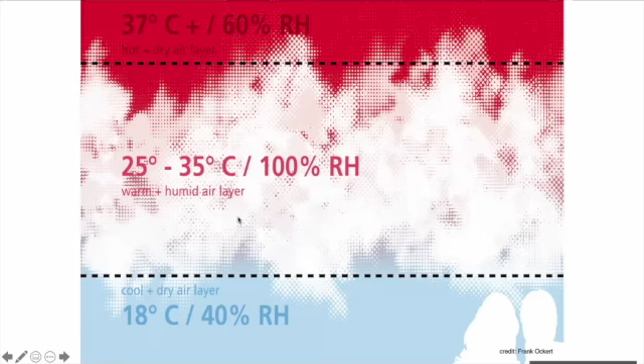So we need another hot layer with something like 90 or between 95 and 100 degrees, but dry air above. And with these two layers, we squeeze this cloud layer in between. So you see, it's engineering, it's climate engineering.

And then Tetsuo Kondo, an architect from Japan, designed the space, he designed the ramp where people could walk through the cloud and really experience the different climate conditions. And here you see the cloud from below, and this is the cloud from above.

So it's just an example of to what extent we can really manipulate climate conditions in a very short distance, and to what extent we could use this knowledge also to provide comfort locally and not condition buildings, big spaces everywhere. Of course, this is not our core business, doing clouds. Usually we try to avoid getting clouds in buildings.

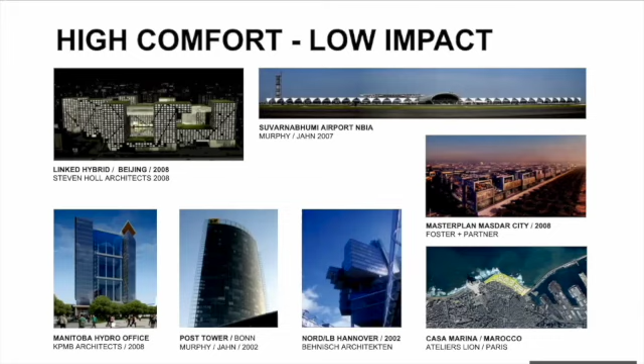Now I could talk about all these amazing projects with amazing architects we had the pleasure and the honor really to work with over the past almost 30 years, which was an amazing experience. But let me focus on this.

I think it was amazing when Biden yesterday announced that the United States wants to reduce carbon emissions by 50% by 2030, and that the next decade will be decisive. That's a short period. 10 years is nothing for the building sector. And like Stefan said, the building sector is kind of key. It's key because, from all sectors, it has the highest contribution to our carbon emissions.

But not only this, our building sector is also responsible for a certain amount of carbon emissions that comes from the industry, like material production, but also the way we design cities, our urban design planning, is contributing significantly to commuting. So density, urban sprawl, etc. So it's not only building design, it's urban design, and altogether it is decisive of how we design the environment in which people live.

So it's a very high responsibility, and we know that this requirement of reducing carbon emission by 50% is going to change our built environment. The question is how, and how can we design it? I'm trained as an engineer, but from my point of view, it's less of an engineering task and more of a design task. And I'm going to show you a couple of reasons why.

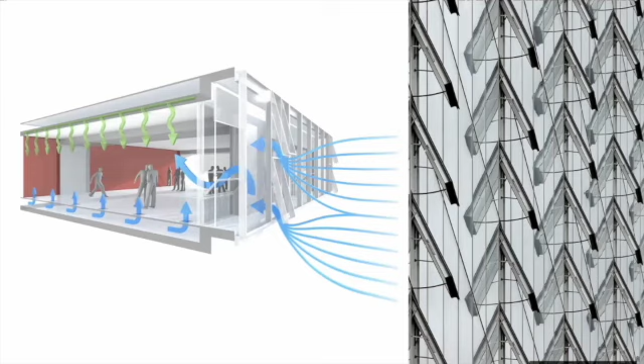So you see this high adaptivity of the facade systems, of the overall building, of how buffer zones wrapped around the building, combined with openings, combined with retractable shading devices, all contribute to a passive, mechanically hybridized climate control system and strategy.

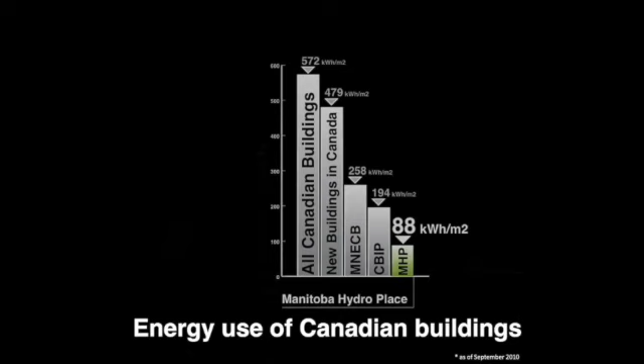What does this all mean in terms of energy? So what you see here, MNECB was the building code when we designed the building. So it was requested that we design the building for a number somewhere below 260 kilowatt hours per square meter in a year. On the left side, this is typical Canadian commercial buildings. And the 88 kilowatt hours was what we projected in design with our modeling. So you see it's significantly lower.

And then when we started to operate the building, after a couple of years, here first the good news, in terms of complaints, that was a surprise for us. Manitoba Hydro did this kind of post-occupancy evaluation, comparing the building to other buildings they operate.

And in the 3rd year of operation already, we had only 50% the amount of complaints for too hot or too cold in this building. Despite the fact that we condition it with the concrete slab, it's a system which is so slow reacting that if someone complains that it's too hot or too cold, it takes about 24 hours to correct the temperature by something like 2 degrees. So it's so slow reacting that there's basically no control.

And compared to a fully air-conditioned building where people can go to a thermostat and say, I want to have 72 degrees now, and then an air conditioner kicks in, compared to such a building, we have half as many complaints. Very interesting. Good point for research.

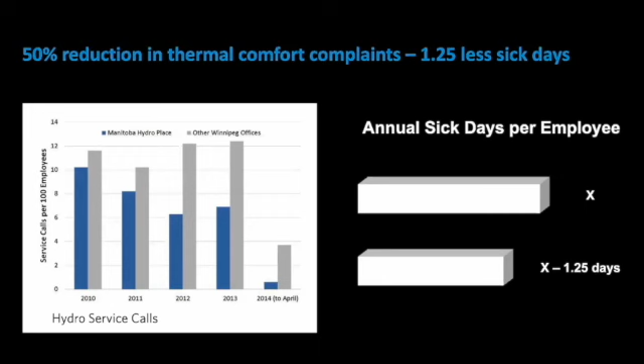And then every workplace is exposed to daylight. We have, which became interesting now in COVID times, 100% outside air, no recirculating air in this whole building. And so overall, we have 1.25 less sick days measured compared to other more typical North American buildings. So that's the good news. So people obviously appreciate the environment, the daylight, the natural ventilation, the radiant cooling, and not the drafty, noisy, typical air conditioning systems.

Now the bad news, we also looked at energy, and the first year of operation when we had full data was in September of 2010. And the previous year, we ended up with a number which was almost 100% higher than what we had projected. And then it was October 2010, November 2010, and so on. And it took us 2 years of fine-tuning, of monitoring, to get to what we had predicted. 2 years.

And you see here, there was a jump. In the first year, we had some issues with the hydronic system. We couldn't really use the geothermal heating system well. And so some adjustments needed to be done. But everything else was only fine-tuning controls, sensors which are a little wrong, or lighting which turns on too early, all these kinds of things. So it was not the one thing, it was like 100 things.

And you need to find them. You need to spend time. You need to look into the BMS, the building management system, and fine-tune and find all of these things in order to get to the building operation. So we call this performance gaps. Something we got really concerned about.

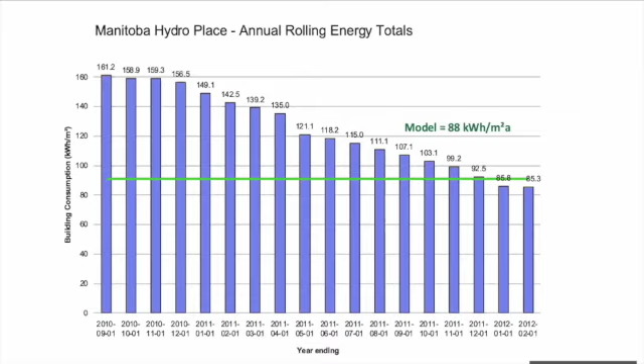We thought, are our buildings too complicated with this high adaptivity of shading devices that go down, operable windows that open up, etc.? Is it too complicated? Also, this hybridized approach between passive and active. So we did some literature research, and we found this study done by the Royal Institute of British Architects, called Better Spaces for Learning.

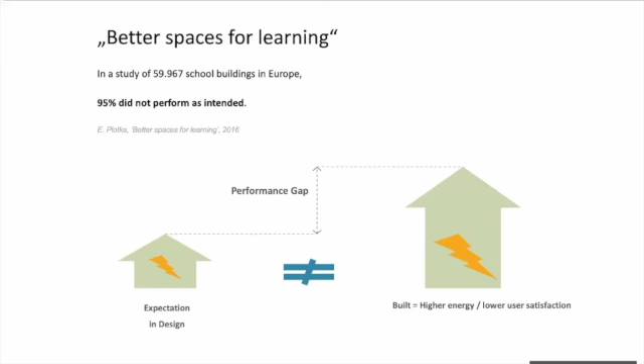And in this study, they looked at almost 60,000 school buildings all over Europe, and they figured out that 95% did not perform as intended. 95%. So we recognized it's not just us, it's totally normal. It's totally normal that we design buildings which do not work as designed, and we just accept it. And then we found another study in Germany and figured out that typical office buildings have an average performance gap of 70%. 70%. We accept.

We always blame the automotive industry that cars are using more gas than what they advertise. But we are not better. We are worse. Just recently, someone in a public discussion said the building industry pretty soon is going to have their Volkswagen moment. I think we are not there yet. Given the pressure that comes now with what Biden announced yesterday, it will come now. We're going to have our Volkswagen moment now, and we have to become serious about this.

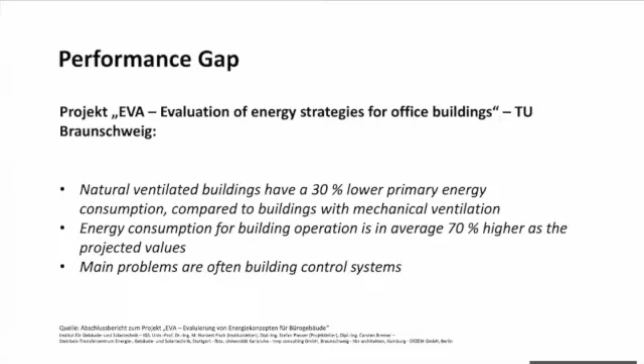So what we recognized, we developed these models on these highly adaptive facades. We showed that in extreme climates, not only in cold climates but also in hot climates, we can do smart buildings, even if they are highly glazed. They can be very efficient. They provide good comfort. They have this kind of adaptivity. But this is what we see. And the building in Canada, we completed in 2010, 10 years ago. Except for ourselves, almost nobody in North America tried to copy the model.

It's kind of annoying. So this is, let's say, international style. But the model we have developed, we showed that it can be successful. But we also recognized when we need 2 years to get it to operation, it's not a robust model. So as a first hypothesis for tonight, I have to state that this glass architecture has failed as a model in terms of robustness and sustainability. That's what we need to state.

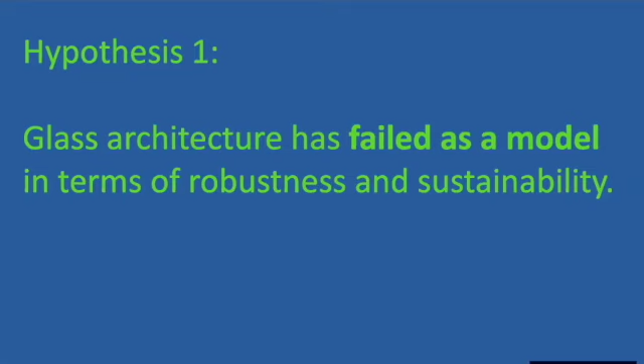And so over decades, we talked about high tech and low tech, and we never found a definition. And so suddenly with robustness, we have a methodology we can use to really test how robust the system is. Like the Manitoba Hydro system, when we tested in our modeling with a shading device that failed, and an operable window that doesn't open, then we suddenly recognized the space overheats. So we need to have these kinds of stress tests to see how robust an overall system becomes. And that's why we love to talk about this, because, again, high tech and low tech, there is no real definition of what it means.

At the university, we worked on 2 books. And I want to quickly show you some results of one book, which was another aha moment for me personally. So this is a book about schools. Unfortunately, those books are published only in German. I'm very sorry for this. But we did this book on schools where we compared 12 schools together with the chair of Florian Nagler. And the bottom right school here is a pure timber building, massive timber building, designed by Florian himself. Florian Nagler is an architect from Munich, and is also a colleague at the university in Munich.

We looked at buildings from different periods, and we started with a building from Theodor Fischer, who was a very important architect in Germany in the early 20th century. He designed this school building here on the upper left side, which was completed in 1898, so 120 years ago. And then a building from modernism in Amsterdam, some buildings from the 50s, 60s, say this one from Günter Behnisch in Göppingen, and then 80s, some of them already renovated. And then a couple of newer buildings, basically 2008, 2011. Those 2, Recklinghausen here and Erding, are designed as passive house schools without operable windows. And then this timber building.

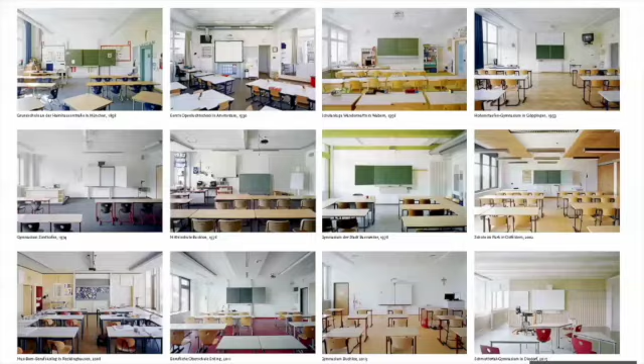I don't want to go through the details, but we asked the photographer to go there to take pictures in every building from the same position. So we have pictures from every classroom, which was quite interesting, from every corridor, and even from the mechanical rooms.

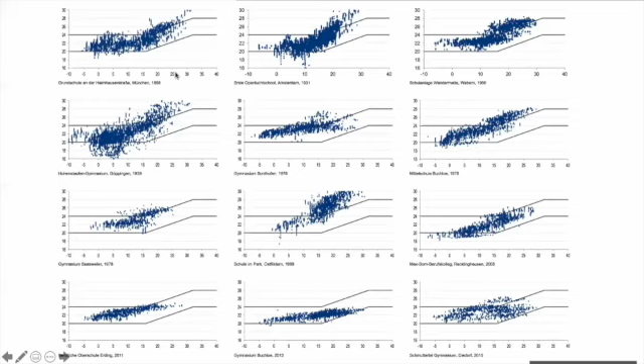And then we did measurements. And so you see here a 5-minute measurement during occupation time from each building, looking at outdoor temperature on the left side, an indoor temperature over outdoor temperature, and you see the comfort band. And don't worry, I'm not going to go into the details. I'm not going to explain every single number. But we also looked at CO2 concentration, so on air quality.

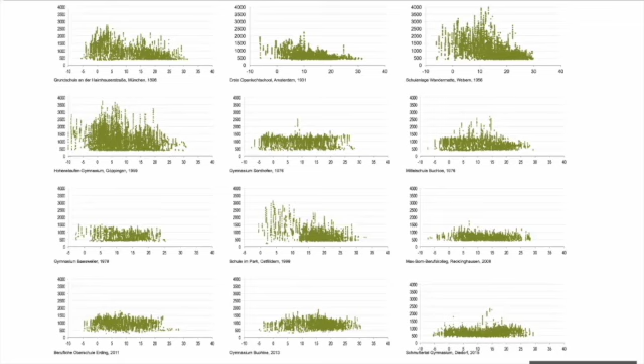Some of the buildings do have mechanical systems with cooling. Some of the buildings have mechanical system for ventilation. Some of the buildings are purely natural ventilated and have no mechanical cooling.

What we figured out is that the building of Theodor Fischer, which was completed 120 years ago, the space is 4 meters tall, which is like 12 feet tall. And it has 800 square foot instead of 600 square foot, what we do today. And we do something like 9 feet tall today. This one has 12 feet. So much more volume per kid sitting in there.

So what we figured out is that from all buildings which were naturally ventilated, the historical building had the best air quality, which is kind of understandable because we have twice as much air volume in this building per person sitting in there. But also from all buildings without mechanical cooling, it had the best thermal comfort in summer.

Given the thick brick walls the building has, also partition walls 1.5 feet thick, the thermal mass led to the fact that this building has the best thermal comfort in summer from all buildings without mechanical cooling. But not only this, it has these tall windows, and because of these tall windows with the lowest fenestration ratio, we get the most even distribution of daylight because those windows are taller because the space is taller, and so daylight falls deep into the space.

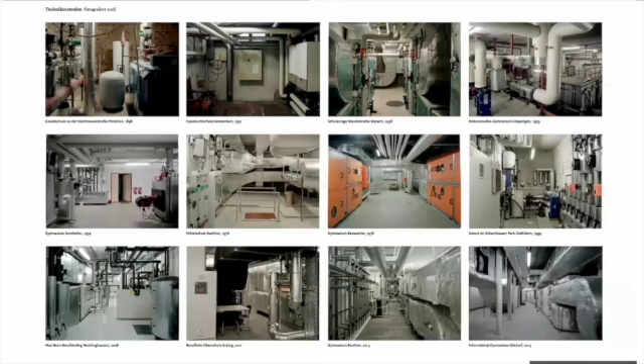So today in research, we would call this multi-objective optimization. And now coming back to Aravena, his quote, at the time, 120 years ago, this was common sense. And this is what we have lost. You see here the mechanical rooms of the buildings. In the Theodor Fischer building, we have a boiler room of something like 300 square foot.

In the timber building of Florian Nagler, which is supposed to be, let's say, high-end energy efficient in terms of all the high-tech, high-end mechanical systems, they had to build a gym under the building to house all the mechanical systems needed. All the mechanical systems needed to achieve an energy efficiency, which is never there because of performance gap. To achieve an environmental quality, which we have lost because we lost this idea of architecture.

We lost the floor to ceiling height. We squeeze people in much smaller spaces. And then we try to overcome this loss of environmental quality with mechanical systems. And then we save space above ground in order to build it below ground. This is stupid. This has a level of stupidity, what we are doing.

So I don't want to talk about style here. I don't want to say that we have to go back and do buildings like 120 years ago. It's this understanding of environmental quality, of spatial quality, and get this back into architecture, get it back into design, and not try to solve everything with mechanical systems.

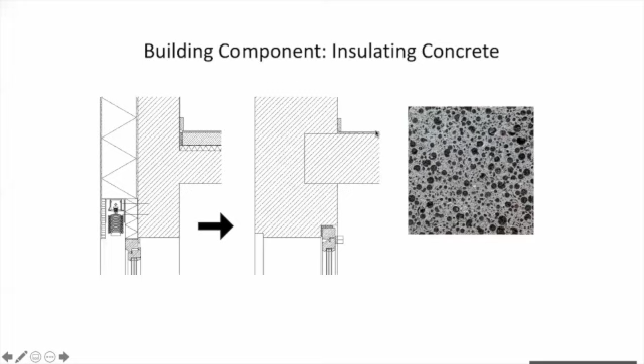So we need to design like Theodor Fischer. Then we don't need a shading device. We use insulating concrete, so then we don't need to have outdoor insulation. We put all the installation, make it visible, put it on top of the walls. Then we don't need this floating screed. And so the same principles we developed, mainly Florian Nagler, his chair, also for timber. How can we design a timber building, reducing the amount of layers with brick?

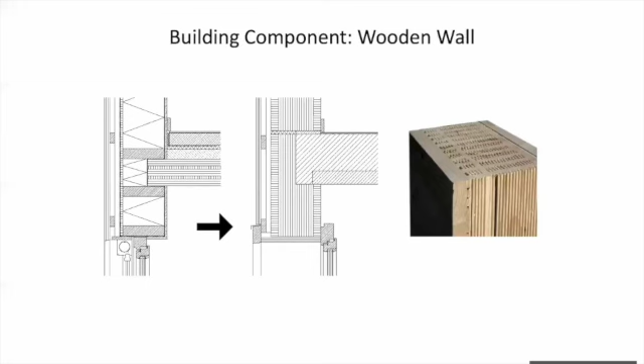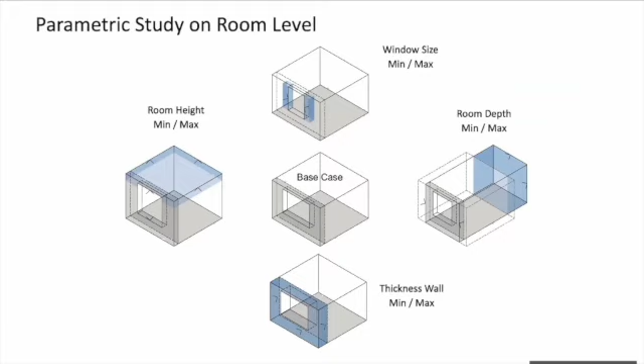And then we found a developer who was interested, but we also did this kind of parametric study on room level. And we wanted to prove that building height is essential, room height, floor to ceiling height, that if we increase floor to ceiling height, we can get the narrow windows that are tall so that we get daylight deep into the space. We get a very even daylight distribution. But by doing this, we get lower fenestration ratio and then get rid of shading devices.

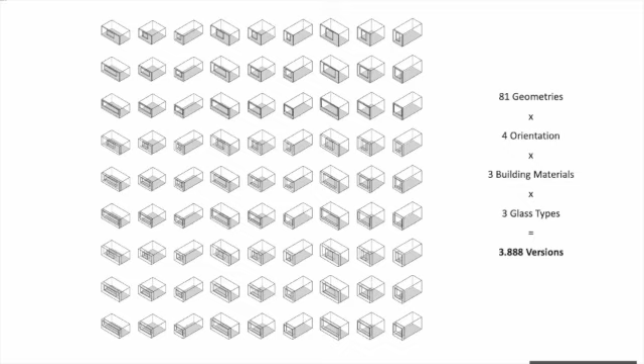And so we ended up with 81 geometries, 4 orientations, 3 different building materials, 3 different glass types. So we studied something like almost 4,000 options and basically tried to prove Theodor Fischer, tried to prove common sense of 120 years ago. And then we looked at uncertain boundary conditions on top to test how robust the overall system is.

And again, I don't want to go into the details, but as a final result, what we figured out is that the brick building here, for instance, compared to a passive house over a 100-year life cycle, even though we designed those buildings to minimum energy standard in Germany, we said, forget about energy efficiency. We don't go beyond minimum energy standard. And then over 100 years, for a normal user, so the dotted line here represents the normal user, we are better or almost the same as a passive house.

The timber building obviously is much better because it has less embodied carbon because of materials sequestration of timber in the building construction. So we found that this is much more robust. Even though we have a higher energy consumption on day one, over 100 years, we have a better performance than all of these, let's say, super high-end buildings, not even considering performance gap.

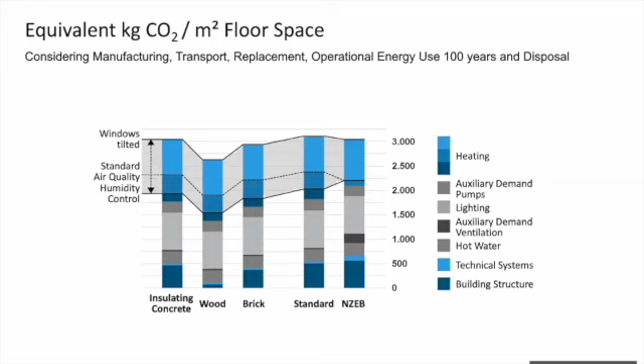And then we found this developer in Bad Aibling, B&O Group, who were interested in this research, and they said, come on, I'm gonna build you 3 of these buildings. And now these got highly published all over Germany, because I think also of the aesthetics. I was impressed that we do all these research projects which end up in a report. Nobody cares about these reports. But as soon as you build something, all of a sudden, it's published everywhere.

With timber, of course, you can have a beam, but also with masonry, we said no beams here. The bricklayer had to lay down this arch so that we don't need any beam, any steel and concrete in this brick structure, so that we keep it all pure, one material.

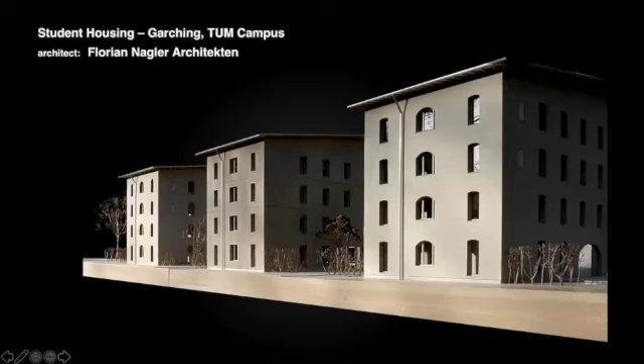And now we are in a phase where we design 3 buildings for student housing, a total of 200 rooms. And now you see the roof system, the roof structure. So we said as a next step, we have to become carbon neutral or zero energy, however we want to call it. And then we looked at how much energy do we need to generate if we put photovoltaics on the roof. And then I went to Florian and said, we need bigger roofs. We need to generate more power. And therefore he started to design these overhangs.

And he said it's kind of interesting because through modernism, we got rid of these overhangs. And now all of a sudden, because of solar energy, we get it back into design as, let's say, a kind of a design methodology.

Here you see the idea again using space height. This is a picture into the model. The spaces here are also something like 10, 11 feet tall. And so the bed is on top of the bathroom so that we get taller, but also more narrow. Here again, this is a model picture. You see the bed on top of the bathroom.

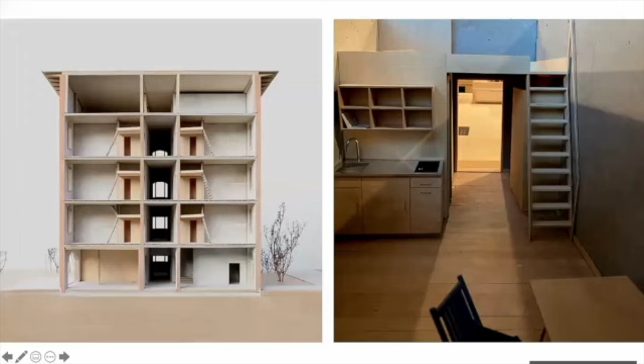So this is in design, and I hope we start construction this year. Again, picture from the model. You see the extended roofs, creating this overhang to get more solar energy generated on the roofs.

So we always have this debate of minimizing material due to embodied carbon. And just for fun, I looked up how much embodied carbon do we put into 1 square meter, so 10 square foot of wall assembly. And if we have a double facade, floor to ceiling height, then you see that even though it's always considered lightweight, the highest embodied carbon we do have in a glass facade, like the Manitoba Hydro facade.

If we use concrete and external styrofoam insulation, this is concrete wall, then a brick wall, sorry that it's named here in German. And then this insulating brick is better. But then as soon as we get to clay and timber as, let's say, wood wool for insulation, then all of a sudden it can become negative. So that's the potential. So there is no straight correlation between the amount of material we use, the kilograms we use, and the embodied carbon.

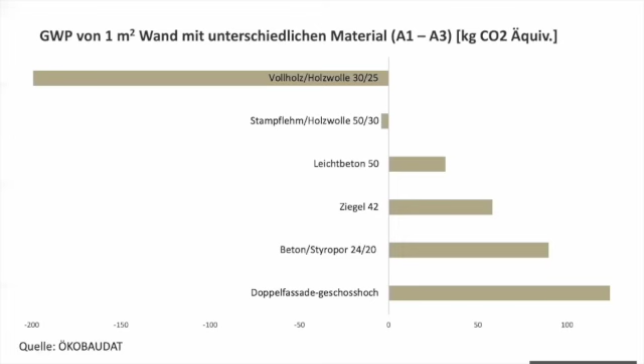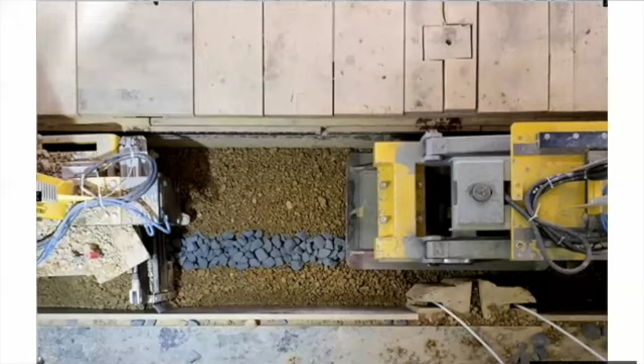So with this in mind, we worked with Haas Cook Zemmrich on the headquarters of Alnatura. Alnatura is a supermarket chain for organic food. And of course, they wanted to have a very sustainable building. And so we ended up with a rammed earth wall. Material was supposed to come from the site. There were some difficulties, I'm not going into this, this would be a lecture in itself. But there is a company in Austria called Lehmton Erde, Martin Rauch. They industrialized, let's say, the production of clay walls.

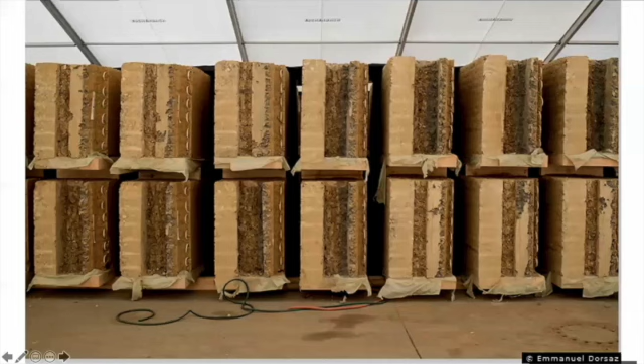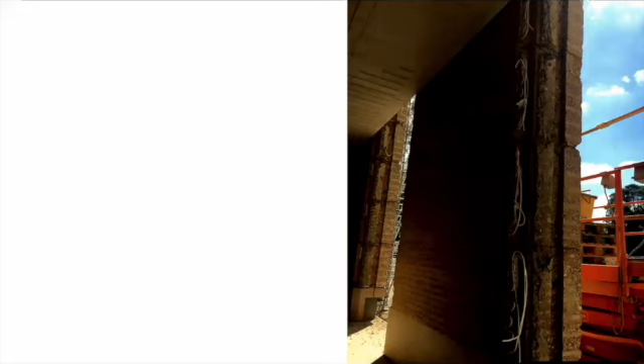And here you see we put in foam glass, mineral material for insulation purposes, embedded in the wall assembly. And then we also put in piping for heating and cooling purposes, so that the walls are a radiant source for heating and cooling. And so he created these kind of wall assemblies and put them into a warehouse close to the building site and dried them during construction time. And then when the superstructure was ready, he had his cherry picker bring them piece by piece on site. Here again, you see the piping for heating and cooling purposes. And this is how it looks now.

This is the space. It's all open. It's really low tech. We reduced the mechanical system to a high degree, trying to take advantage of clay. And the beauty of clay is that it has a lot of thermal mass, providing passive temperature control. But it's also still among the best materials for hygroscopic control of space, so humidity control of an indoor environment. It's a beautiful material. It's available everywhere. You can get it for free.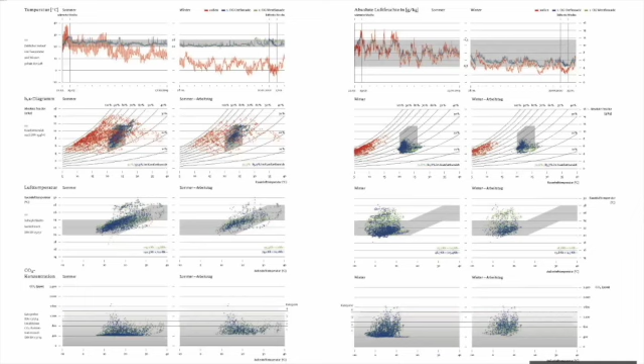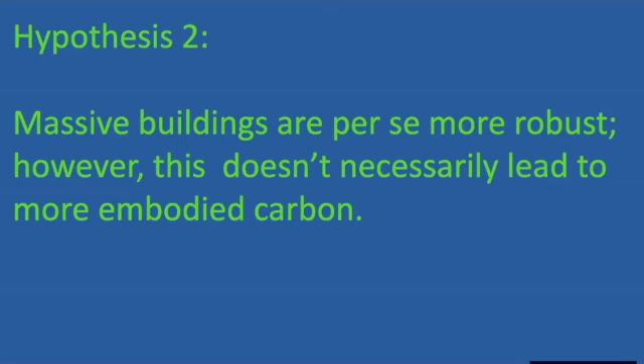I want to finish and show a few slides. I'll go over it very quickly. I've talked too long so far.

Talking about outdoor comfort, urban microclimate. I know in Vegas you're in a desert climate, but we see climate change changing our climates, mainly in our cities. That's why we also have to address climate not only in an indoor environment, but also in an outdoor environment. We did an exhibition last year in Berlin. The basis of the exhibition was a published study, you see the source on the bottom, which showed the delta in temperature expected in our cities worldwide. And we recognized that among the highest deltas we see in Central Europe. So cities in Central Europe are going to see the biggest temperature difference, as well as Vegas, probably this one.

So I know Vegas is also considering incredible climate change, because it's always combined with the urban heat island effect. And the urban heat island effect particularly is a problem at nighttime, when the cities heat up and stay hot in the night. In Vegas, it's an energy issue. People don't stay as much outside. That's a problem. And it causes more energy consumption, which can be significant for air conditioners.

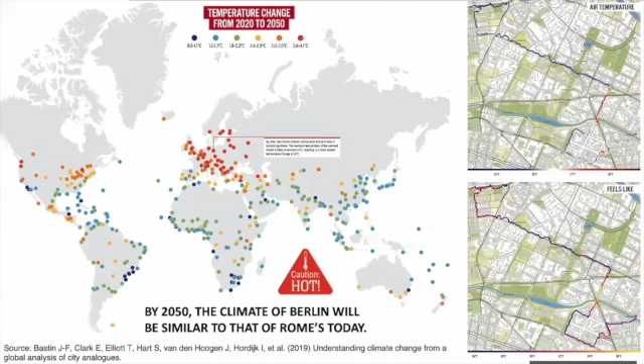So that's the third hypothesis. If I go back, this is even more beautiful. So we can easily imagine sitting here in a hot period. We don't want to sit here when it's really hot and sticky. So we see that the transformation of the built environment towards climate adaptation provides also great opportunities. I mean, that's the basic message. Why do we fear change? The opportunities are much higher than the risks, but it's a design task.

And with this, I want to show you the Place de la République, where we worked with TVK architects and Martha Schwartz on a redesign of Place de la République in France with Transsolar. And you see, this is how Place de la République looked before the transformation: dark tarmac, heating up, making it unbearable, but also see traffic, and it's almost impossible to get onto Place de la République without getting killed by some cars.

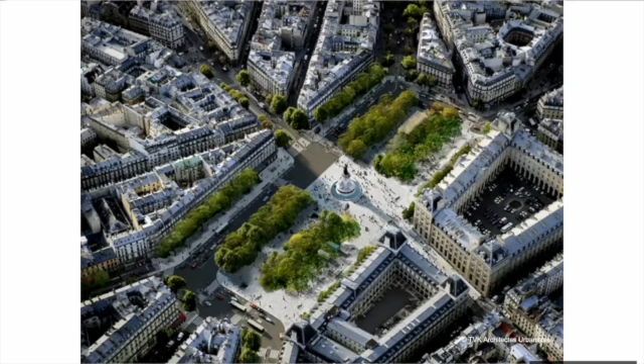And this is after the renovation, after the redesign of Place de la République, just changing the layout of the material, different materiality, evaporative cooling, trees, etc. And then this is how it looks. You see how people enjoy it. It's delight. So it's not a burden, this transformation. It's an opportunity. Thank you very much.

Thank you, Thomas. This was exciting, very good. You raised so many points, and I'm getting a lot of questions coming in for you. And it's so interesting. You had also some provocative points. You're challenging us architects, and you know 95% of people online here are architects and AIA members, but you say you can solve things by design, which is fantastic. It's a very optimistic viewpoint. So thank you for reminding us, challenging us, and giving us the power.

So it's not an engineering task per se. It has a lot to do with common sense. 120 years ago, we knew it, but then we lost it. And you spoke about when architects made rooms simply higher, 3-4 feet higher, which meant that windows could be taller, and there could be all kinds of side effects of that, like the bigger curtains and the more daylight and so on. So it's very interesting. You also spoke about the performance gap, which you very frankly and openly said: many engineers say it's going to be like this, and it's not, something we can talk about, I believe.